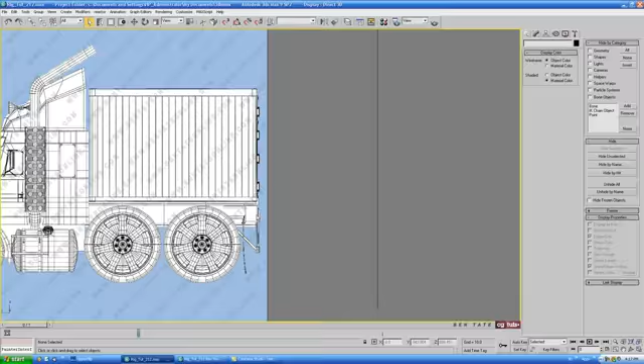Okay, and then we'll go into the left view here and start working on this front rim. Let's zoom in on that. This is going to be a little bit difficult for us to model here. Let's maybe start with the outside of the rim, and let's do that out of a tube.

So let's go back to the create panel, grab a tube, and draw it out here in the center. Let's take that up to about there, give it a little bit of thickness and a little bit of width. Okay, we'll maybe go to the front view here.

Let's switch this to the back view now. We'll just move this over to the right side here and try to line it up with the tire. I'm going to move it out to about there, just so that right side is lined up with the outside of the rim.

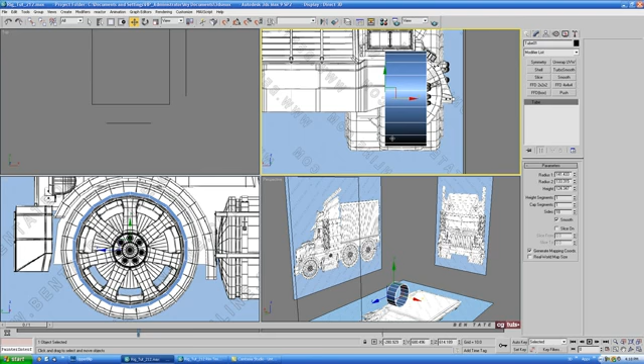We can also get rid of these height segments, we don't really need those. We'll make it a little bit wider here, and we'll apply our blue shader. Don't worry if it's not lined up with the other side, we'll probably have to make some adjustments to it later on. So we'll just start with something like this.

Okay, and if you look at the blueprint here, you can see we have 7 spokes on the rim, so we're going to want to use a multiple of 7 for the sides on this tube. I'm going to take this up to maybe 21, so we can work on maybe 3 sections at a time, and then we'll rotate it around to complete the full shape.

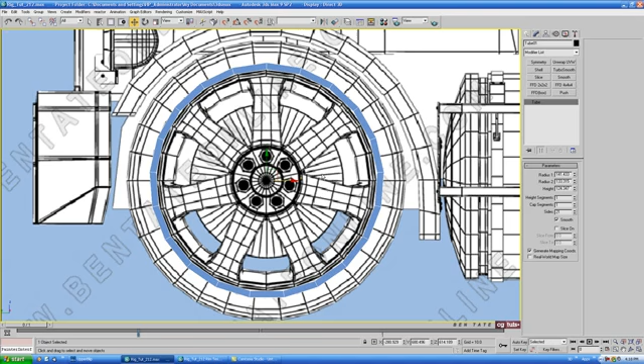Okay, so let's maybe start with something like this. We'll do 141.5 for radius 1, say 133.5 for radius 2, and the height we'll just leave at about 125, with 1 height segment, 1 cap segment, and 21 sides. Okay, so let's convert to editable poly now.

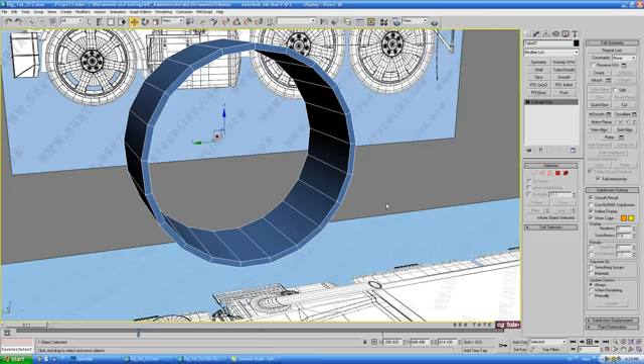Okay, we'll just add some edge loops here in the center. So let's go over to edge, grab one of the center edges, do a ring and a connect, and we'll use 1 segment here. Let's slide this towards the outside, and take that pretty close to the outside, let's do about 90 or so, and okay.

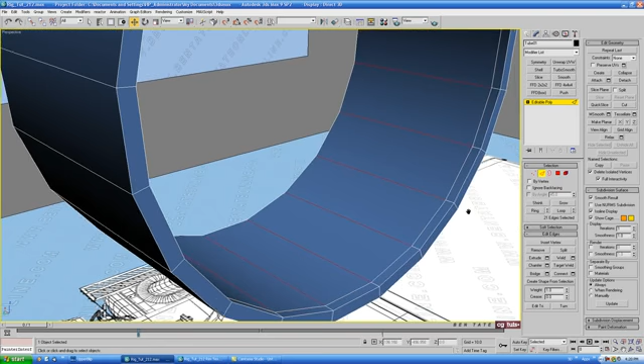And we'll do another ring on the inside edges, and do another connect on that. We'll push this back a little bit more. Let's do maybe around 62, 63, something like that. Maybe even a little bit less, about 60 with 1 segment.

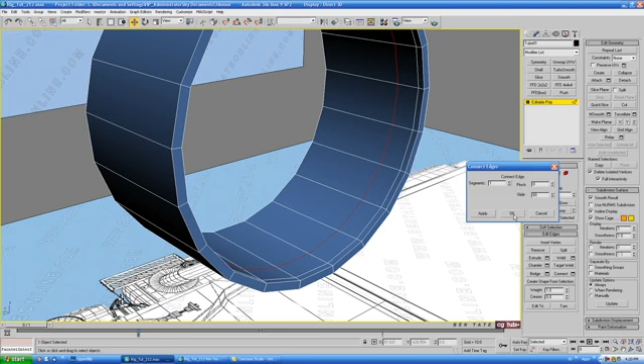Okay, and then we'll ring the middle edge one more time, control click polygon this time. We're going to want to extrude these faces up to give us a little bit of a lip in there. So we'll go back to the front view here and do an extrude, by local normal. And for the height, I'm going to take this up a little bit here.

Let's maybe look at it in perspective. I'm going to take this up quite a bit because we're actually going to pull out one of the spokes from these faces on the side here, so we're going to need quite a bit of room. Let's do maybe about 16 and okay, and I think that should work for us.

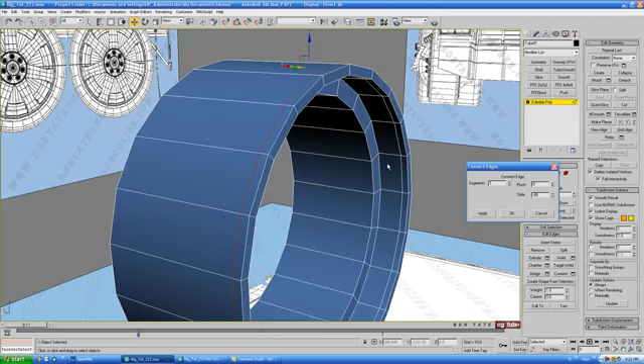So let's go on the outside here and start giving this some detail before we do the spokes. Let's grab an outside edge here, do another ring and a connect, and slide that over to the outside. Pretty close, let's do maybe about -92 and okay.

And then we'll just ring one of these small edges on top here, control click polygon again, and we'll extrude this up. So another extrude, local normal. Take that down quite a bit here, we'll just make a little bit of a lip that the tire can tuck in behind. Let's do maybe about 5 and okay.

And we'll just give the front a little bit more shape here. So let's grab this edge on the outside here, okay, we'll loop that one, and we'll see if we can kind of taper this in a bit.

Let's also remove this edge here on the front first, we don't really need that anymore. So let's loop that one and control backspace it out. Grab the inner one again and do another loop. We'll go into the front view here, go to scale, and we're going to scale this up to taper that front edge a bit, so it's a little bit thinner. Maybe something like that, so we have a little bit of a slope on the side there.

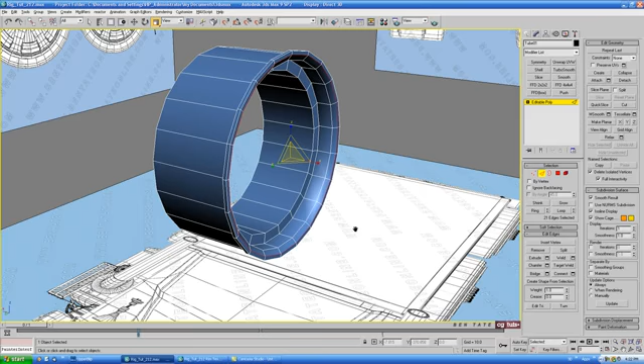Okay, so let's move on to the left view again, and let's go to polygon. Make sure you have ignore back facing turned off, and we're just going to grab the two sections of polys here at the top. We'll hit Control I to invert the selection, and then we'll delete these out.

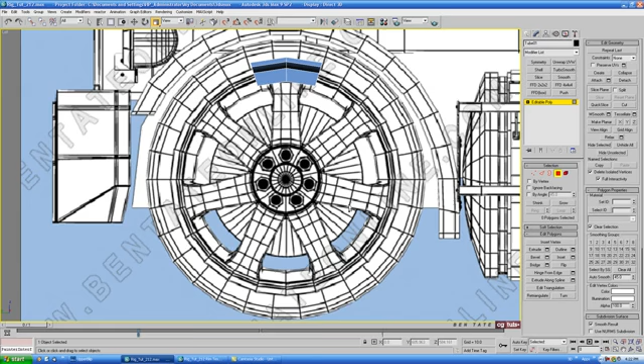Okay, we'll just work on one small piece of this at a time. Okay, so that's what we have so far. And now we need to kind of extrude these faces out and actually connect them to something in the center here.

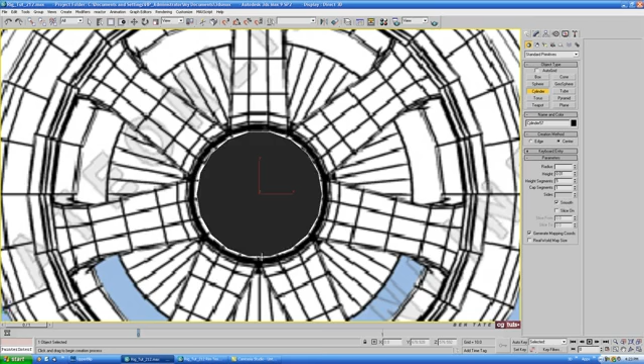So we'll go back into the left view and we'll grab maybe a cylinder. We'll draw that out in the center again, and we'll take it up to maybe about there. Give it a little bit of thickness. And let's put our blue shader on it.

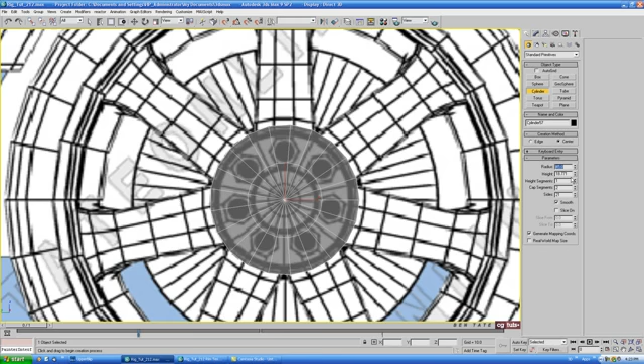Let's take off these height segments, and we'll also do 21 sides for this guy. Okay, so up that to 21. Let's give it an extra cap segment maybe. And let's do about 45 for the radius on that one. We'll do about, say, 25 for the height right now, and we can adjust that later on if we need to.

And we'll just move this over into position here. So I'm just going to move this over in the front view. Okay, we'll kind of line it up here in the center, just behind where these lug nuts are.

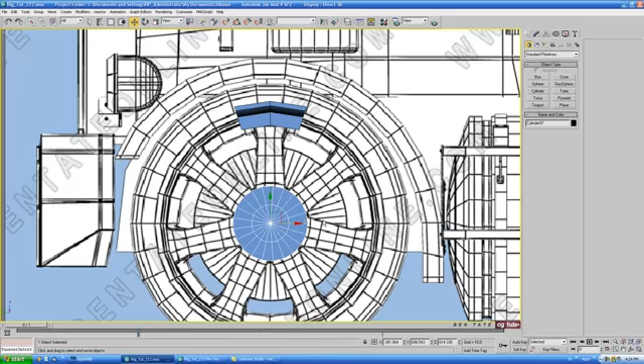Okay, and let's convert this one to edit poly as well. We'll go into polygon and we'll grab—let's actually rotate this a little bit first before I delete those. So I'm just going to rotate this a little bit here so that this face at the top is actually flat. Just give it a little bit of a spin there until it straightens out like that.

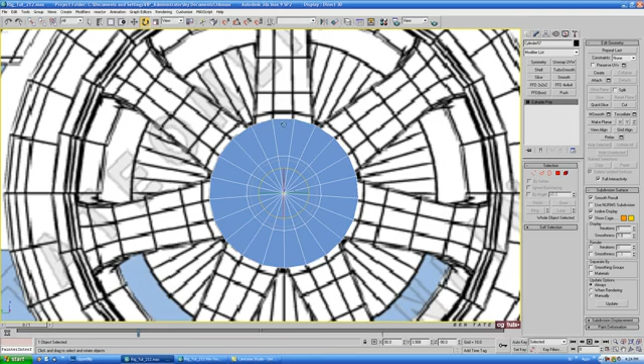Okay, so we have these polygons here right in the center of this spoke. And now we can go into polygon, and we'll just grab the three sets of polys at the top there. So we want the top three, the back three, and the front three here. Do Control I again and delete.

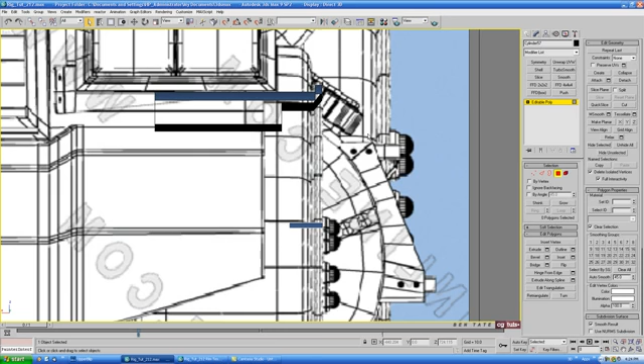Okay, now we'll attempt to extrude some faces out of this piece and actually connect it to this lower part. Okay, so let's get out of polygon here, go back up and select the original piece. And we'll go back into polygon and grab these two front polys here. We're going to need to be able to support this shape when we pull this out.

So what I'm going to do here is actually inset these polygons, and we'll do that maybe—let's do maybe about 1.5. And okay.

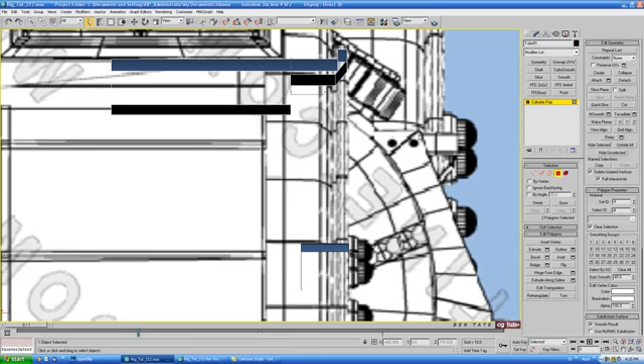And we'll just go into the left view here, and we're going to hit extrude, and we're going to extrude it out just a little bit. Okay, we'll just do about 5 and okay. And I'm going to delete these polygons now. Okay, so we have it extruded out like this.

And we'll go into border and we'll grab the border there around that open hole. And we're just going to shift drag this kind of out and down, and it's going to take a little bit to clean it up, but we'll do that in a minute. Okay, so let's just hold down shift, pull it out again on the X. I'm just going to kind of angle this down a little bit, give it a little bit of a spin here.

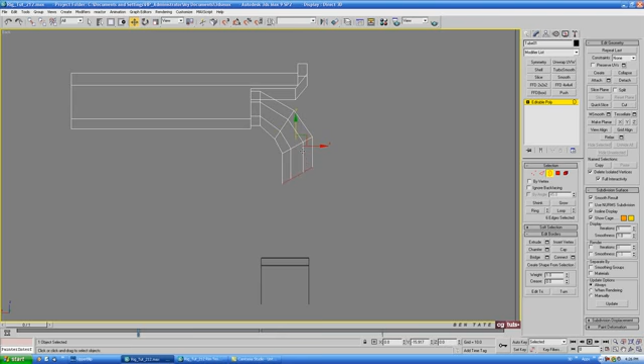Let's extrude it again, give it a little bit more of a spin. And we'll extrude it down. Straighten that out as well. And don't worry if the shape isn't even, we'll fix that manually in a minute. Okay, one more time, shift drag it right down to the bottom there.

Okay, now we need to make some adjustments. Okay, so this is pretty much what we have.

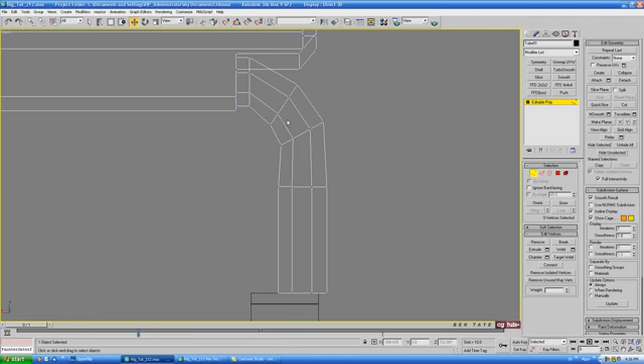Yeah, let's go in here and start kind of adjusting the shape here. You can see it's obviously way too wide at the bottom compared to this top piece. Okay, we also have these back verts here kind of dipped in, which is giving us a bit of a curve there. So let's maybe adjust those first.

I'm just going to grab these ones here, push them slightly to the back, so we have the back almost flat here. And we'll just work our way around kind of moving these down manually. Okay, and we'll grab these two and just kind of straighten it out.

And for these ones here, let's maybe just adjust the curve here a little bit. I'm actually going to grab this one, let's move that back up a little bit more. Okay, we'll move these guys out.

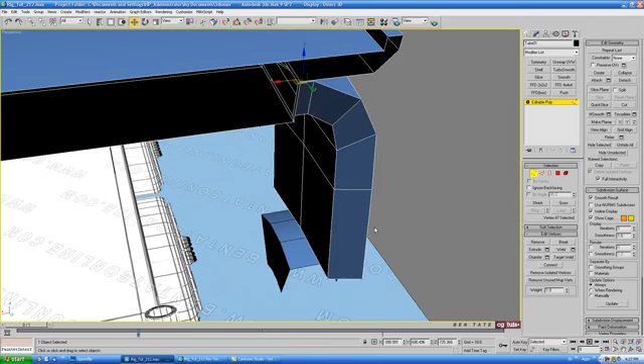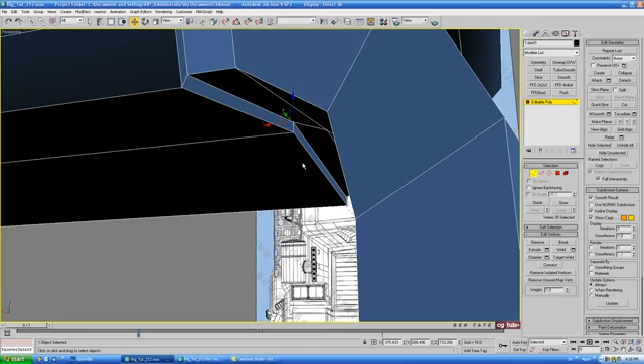Okay, I'm just going to taper this going up into the inside there. I'm going to leave this a little bit farther out than we did below. Bring this guy here down a bit. Okay, I'm just going to see where this vert is. We don't want to move this because that will affect the shape of the actual cylinder, so we're going to leave these ones in the position they are. We'll just even the curve out here going down. It doesn't matter too much, this isn't going to be a really noticeable part, so don't worry about getting it perfect.

Okay, I think we'll start with something like that. Let's go back into the left view here. And we also need to taper this in - you can see how small that is in the background there. So we're going to do that by selecting these edges.

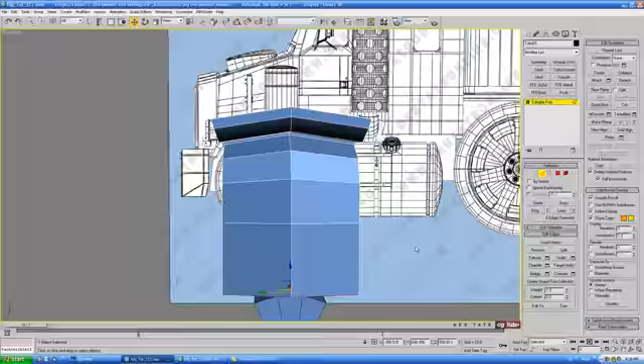Let's just start maybe with this one here, I'm going to do a loop on that edge. Go back into the left view, we'll turn on our see-through here. I'm just going to use scale on the X to kind of taper this in. Okay, it's going to take quite a bit of adjusting, so I'm going to bring that in a little bit. I'm not going to go in quite as far as what we have in the blueprints. Maybe something like that. All right, we'll grab the next loop down and do a loop on that edge.

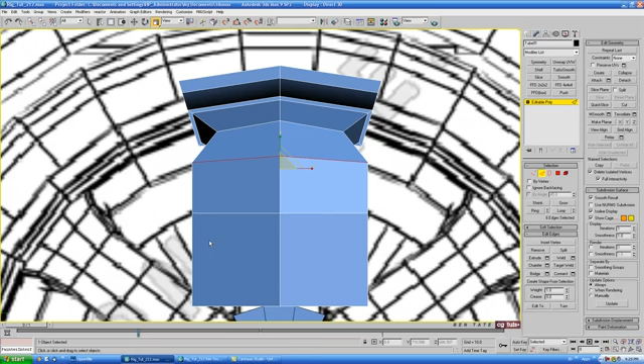Back into the left view, and we'll just taper this in a little bit more, so just scale it on the X. Bring it in like that. Grab the next edge down, loop that, scale it in.

Okay, and finally for the bottom here, we'll just grab the verts. So let's grab all the bottom verts, and we'll just taper that in a bit as well. Okay, now give us a little bit of a shape on there.

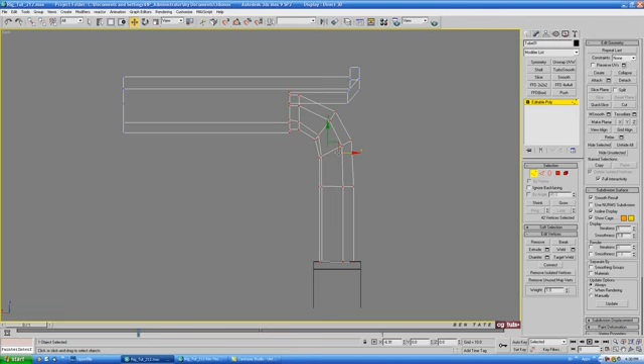Okay, we also need to line it up with the polygons here on this lower piece. So to do that, let's actually move some of the stuff back a little bit. I'm going to grab these verts here around where that spoke connects, and we'll grab all the verts on the spoke as well. We'll leave these ones on the front of the rim deselected, and we'll just push this back a bit, until we kind of center it with that lower cylinder. Like that, which will give us a place where we can actually attach that together.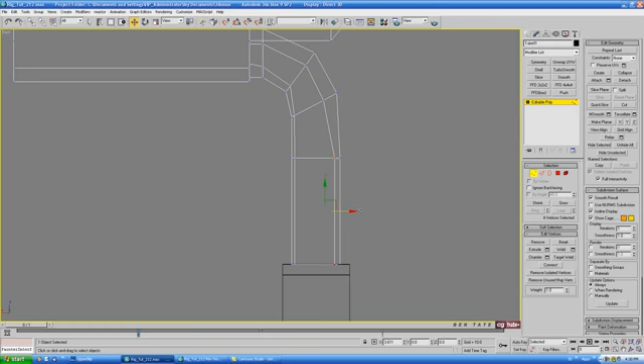Okay, I also don't want to have a total curve here on the front, so we're going to need to adjust that as well. We'll do that the same way. Let's grab these verts here, and we'll just push those out a bit towards the front. Something like that, and we'll do the same thing with these ones, just grab these and push them out. Okay, and don't move these verts here as well, because that'll affect the shape of the cylinder.

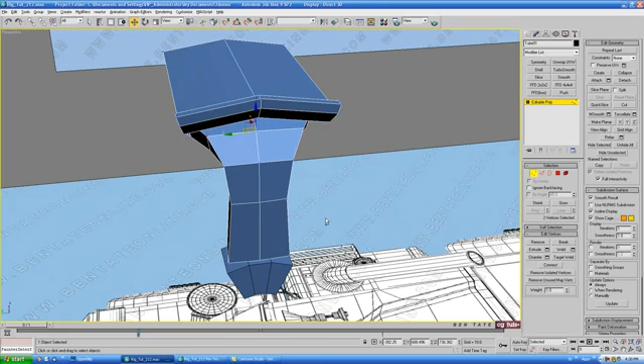Okay, so let's go down here, we'll get out of vertex, select that bottom cylinder. Let's go to polygon, and we'll grab the 3 top polygons, and we'll do the same thing here - we're going to do an inset on these. We'll take it up a little bit more than that, let's do maybe about 2 for starters, and okay.

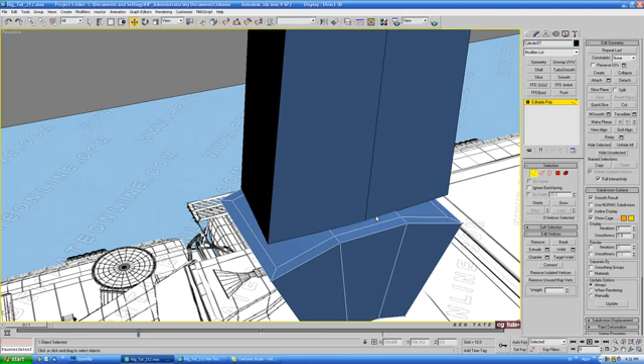And let's maybe adjust the width here as well. I'm going to grab these 2 left verts here, as well as the 2 right ones. We'll put on our edge constraint up here, and we'll just scale this a little bit in on the Y-axis here, so it's a little bit skinnier in the middle.

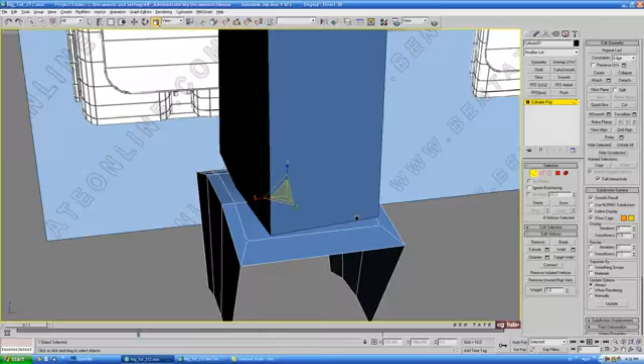Okay, just like that. And we're going to need to adjust the bottom of the spoke here a little bit more. So let's go back out of vertex here, grab the spoke again, and we'll reselect its bottom verts. Okay, and actually before we do that, let's maybe grab this edge here as well as the back one. We need to obviously have a point where we can weld these to these segments down below.

Okay, so I'm going to select an edge there, and we'll do a chamfer on this. Let's take this up until it pretty much matches up with those 2 edge loops. Just like that, about 6.5 or so should be good.

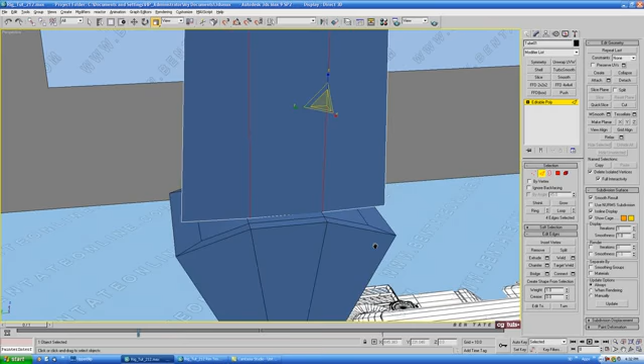Okay, let's get out of edge there. Rather than scaling the sides, let's grab this, go back to polygon, and those 3 polys should still be selected on the top, so we'll delete those out now.

Okay, back in the front view, or the back view, sorry, just going to readjust this a little bit more. Let's go back to vertex, grab these verts here, and move them in a bit. Let's turn off our edge constraint first. We'll just move those over, grab the front ones here and move them back. Okay, so it kind of fits the size that we need.

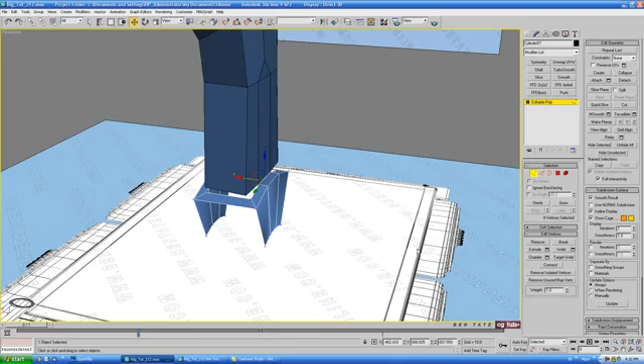Okay, let's get out of vertex there, and we'll see if we can attach this together now. So let's grab the spoke, go over to attach it to the lower cylinder, and back to vertex, and we'll just weld this together now.

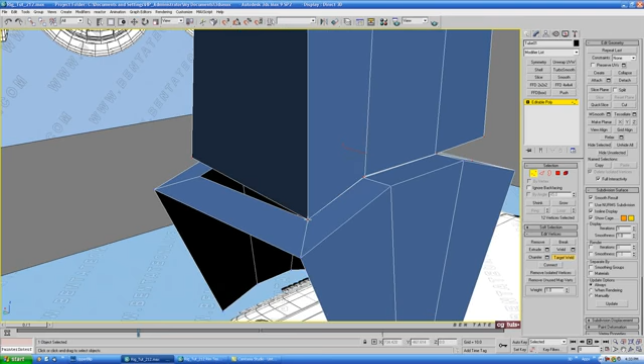Let's go over to target weld, grab one of the corners here and weld it. We'll just work all the way around this, welding all the verts. So weld these to these ones, around the back and around the front. One more here, and here. Then I'll continue those down onto the lower cylinder.

And let's also go up here and grab maybe this vert here and this one. I'm just going to open up the weld box and we'll just take this up until these two verts snap together, okay, so looks like about 15 or so. Hit OK to that, same thing on the back, grab those two, hit weld. And we'll still have an extra vert there up where the top of that triangle was.

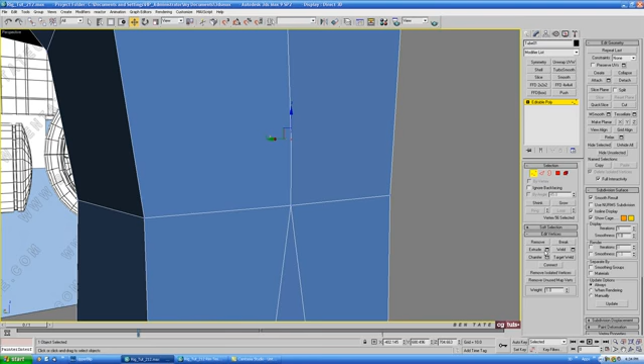So we'll go to target weld and we'll just weld that one. It's a little hard to see here, it's right in the center, this one here, down to that vert there. Okay, same thing on the front, this vert here, down to this one.

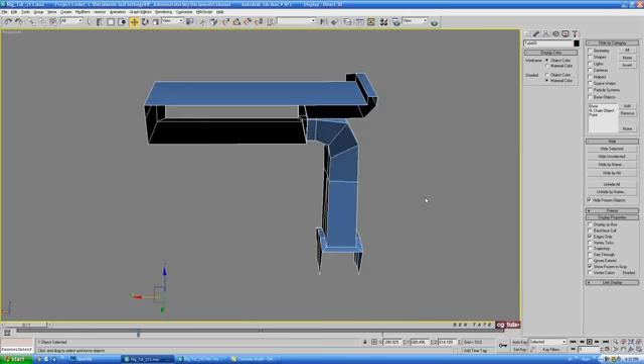Okay, so now we need to add some support edges before we can start copying this around. We can actually get rid of these blueprints again for now, just so it doesn't slow down the capture. I'm just going to check that back on, and we'll just continue to work on this. Okay, so I think that's basically the shape we're looking for here.

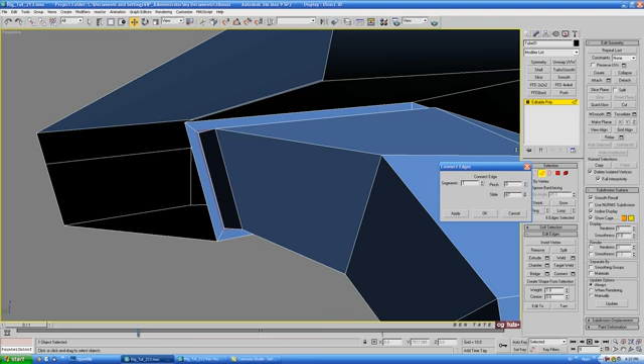Let's start adding some support edges. So let's go up into the top here. It's going to be a little hard to see, but we'll go into edge and grab one of these corner edges here around the inset that we did. Let's do a ring on that, and we'll do a connect, just one segment, and slide that towards the spoke. I want this one pretty tight, so let's take it up to maybe about 65 or 70. We also need to add one around it this way, so let's grab that corner edge there, another ring, connect it up, and slide that back, about the same distance, around negative 85 or so.

And let's maybe support the actual spoke here. So let's grab one of these side edges, do a ring on it, connect that up. This time we'll use two segments, and we'll just pinch those out a bit. I'm going to leave it a little farther back so it's a little softer on the corners, let's do maybe about 75. Same thing on the other side here, ring one of these edges and connect.

And we'll do the same thing on the front. Let's maybe grab these two edges here, we'll ring them. We don't want to continue these up and over the top of the rim, else it's going to give us a hard spot right here on each side when we later array this around. So we want to end these edge loops off somewhere underneath here.

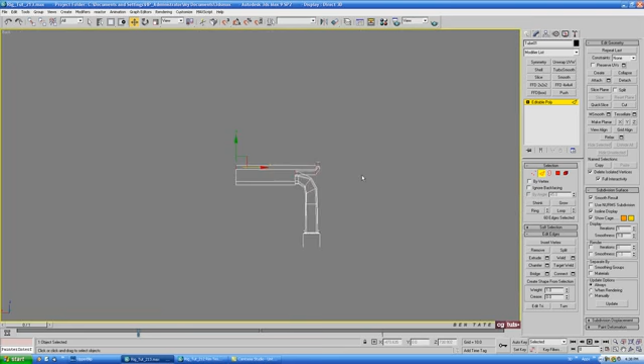Alright, so let's go into the back view again. I'm going to deselect these back edges by holding down Alt. We'll also deselect these ones here at the top, and maybe this one here.

Okay, same thing on the inside here. We don't want these to go all the way to the back, so I'm just going to deselect these two back ones. Let's maybe just leave it selected up to this point for now. We can clean it up a little bit later on.

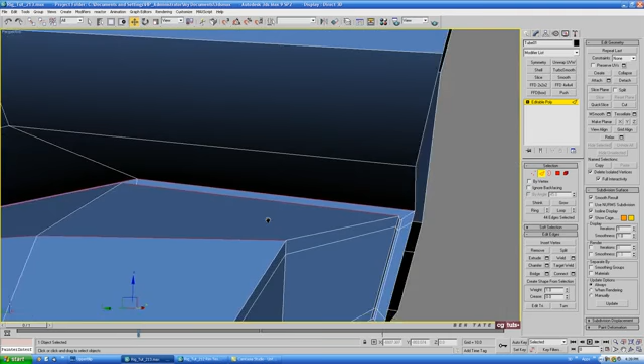Okay, and on this part here, let's maybe just leave it selected up to that inner edge there, and we'll clean it up a little bit more later on if it gives us a problem.

Okay, so with those edges selected, let's maybe deselect this front bottom one on each side as well as this one. Okay, same thing on the back here. Get rid of this edge, this one, and this one, so they end off right here on each side, as well as the front on each side.

Okay, and for this one we'll do another connect, and we're going to use two segments here. We'll do that about the same, about 75, and hit OK. We don't need to have these center edges, so let's click one there, control click the one next to it, do a loop on that.

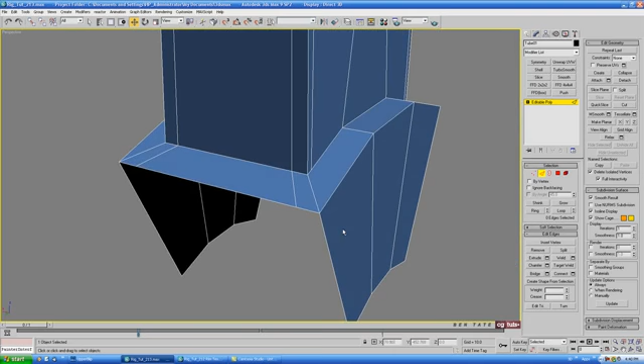And we'll just control backspace those out. Okay, down at the bottom here, we're going to need to clean this up a little bit right here. Let's maybe do a ring on this edge first. Okay, and that won't go all the way around because this is an n-gon here. Alright, so we're just going to have to manually select these edges.

Okay, all the way around the back. And we'll do a connect on that. We'll just use one segment, no pinch, just slide that in towards the base, and we'll do maybe about 65 or 70 on that one.

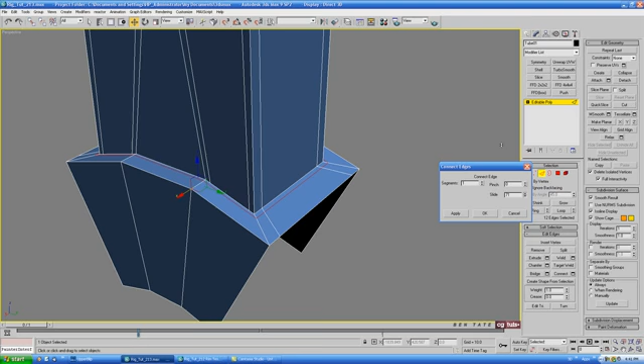Okay, same thing on the back here, we don't actually need to have these extra loops. So I'm going to grab this one and loop them. That should go right up to that point there, and we'll just control backspace those out.

Okay, so we're going to need to kind of terminate some edges here. Let's maybe do that right now. So I'm just going to go over, get out of the edge here. We'll go to cut, and we'll cut from the bottom of this edge here where this vert is over to this edge. Okay, and just try to get that kind of straight there, and then right click to end it.

So it comes straight across. We'll do the same thing over on this side. Cut that right over, and the same thing on the front. Okay, just cut that across, right click to end it, and same thing over on this side.

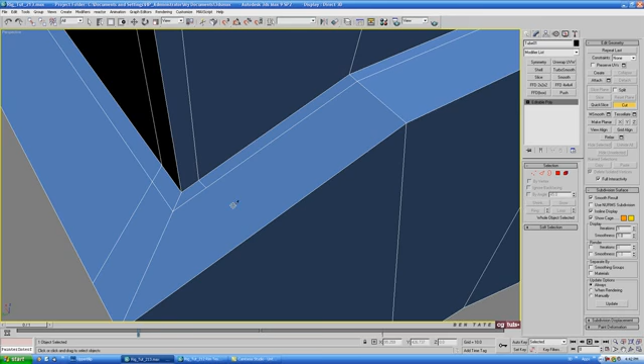And now we'll just go over and turn off cut here, and I'm just going to go back to vertex. I'm going to grab the vert right there, as well as this one here. Okay, and we're going to actually connect this up. Do the same thing over on this side, grab that one, and do a connect.

And the exact same thing on the back. Connect that one up to this one, and this one up to this one. Okay, that's going to give us a triangle right here, but I don't really think that'll give us any problems in this particular situation. Okay, so we'll leave it like that just to end those loops off.

For the side ones here, we need to actually kind of straighten these out. This might give us a bit of a problem later on, so let's grab this vert here, and let's grab all four of these for a second. Okay, we'll see if we can see this in the top view.

Okay, so there they are there. We're just going to use scale on the x-axis to kind of straighten these out. Alright, so I'm going to take that over just a little bit here. Alright, that's going to be a little hard to adjust, so let's just do it by hand here.

Okay, I'm going to go in there and just grab this one vert, straighten that out. Okay, we'll follow that edge down and grab this one, which is the one on the outside, and we'll just pull that over until the edge goes straight.

Okay, we'll do the exact same thing over on this side. Let's just grab this guy, straighten him out. This one here, straighten him out.

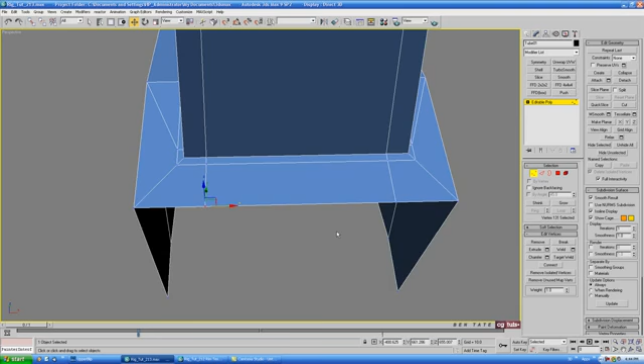Okay, same thing over on the other side. Just spin around here and see which verts they are, so we'll grab one there. And we'll just pull that over until it straightens out. And we'll grab that end guy and just do the exact same thing. Okay, same thing over on this side.

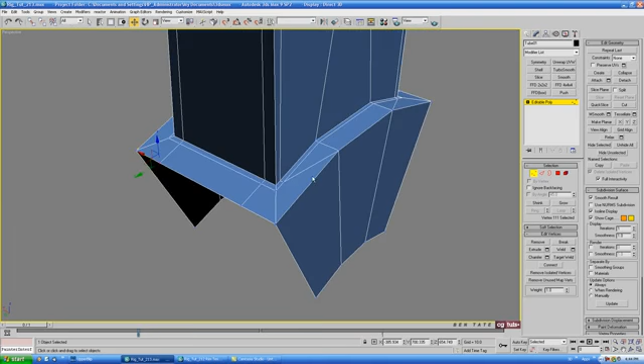Okay, just like that, so these will be able to be welded up to the next piece that'll be in here once we copy it. Okay, so let's go back up to the top here. We still need to add some more edges up here.

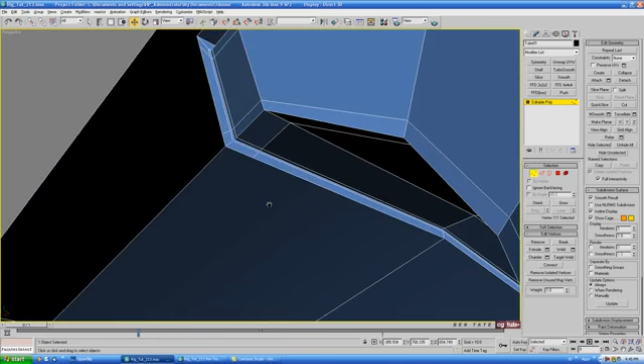Okay, let's maybe do a ring on this edge here. Now it won't ring actually because we still have that vert ending off at the back there, so we'll just manually select these three edges here. Okay, another connect, use two segments again, no slide, and we'll just pinch those out to support these outer edges.

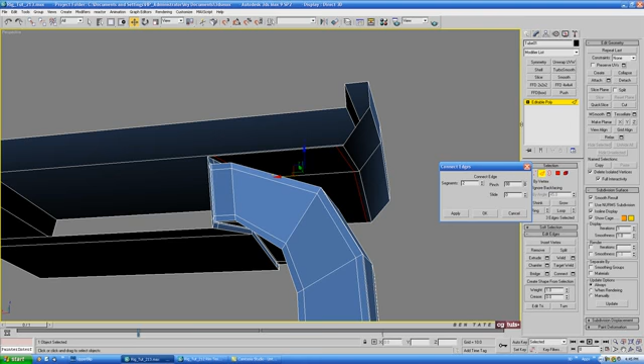Alright, let's do maybe about 90 or so on that one. And we'll do the same thing on the front here. Ring those and connect them up.

And we'll do this one a little bit sharper. Let's do maybe about 80. Same thing on the front.

Let's take this one down a little bit. Let's actually just do one segment here for now. I'm going to slide it down to the bottom so we can kind of sharpen this bottom edge a little bit more than the top one. Okay, so leave it about there.

Then we'll ring the edge again and connect it. And this one I'll slide down a little bit more so it's a little softer at the top. Let's do about 50 or so.

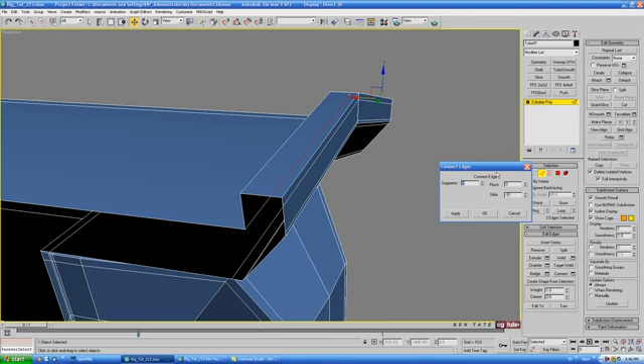Okay, and we'll grab the top edge there, do another ring and another connect. We'll use 2 segments on this one, no slide. And we'll just pinch those out slightly.

Now we'll use about 50 again. And the exact same thing on the back. Ring that back edge and connect it. And we'll do that about 50 as well.

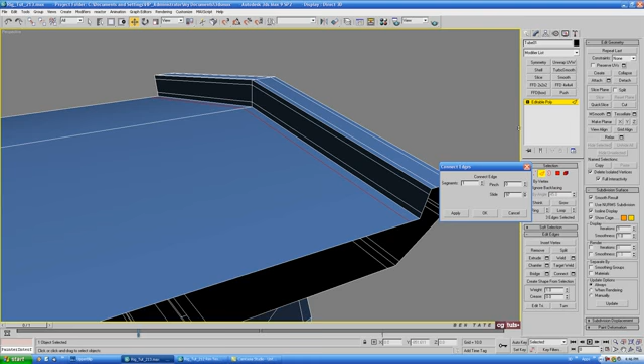Okay, and let's grab this one here. Ring and connect, and let's use 1 segment on this one and slide it towards the back there. I want this one to be quite tight, so let's maybe do about 99 on the slide with 1 segment.

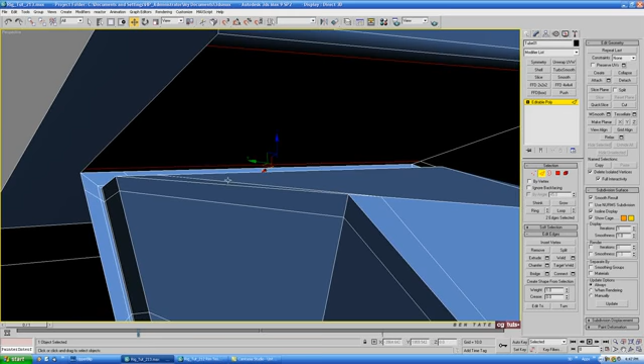Okay, and now for these edges we need to terminate here. I'm going to do this a similar way. We'll just grab this edge and the back one there. This is going to be a little bit hard to see here, so I'm going to try to get a decent angle on it.

And we'll do a connect here with 1 segment. Okay, I'm going to slide that down towards the other end until the end there kind of lines up over where that vert is. So it looks like around negative 82 should be good.

We'll do the exact same thing over here, grab this edge underneath, as well as the back one, that back support edge there, and connect it up. For this one, we'll do positive 82, so we have it in the same position.

Alright, I'm going to try to zoom in on this. So let's grab maybe the vert there at the end, and we'll hit Z to zoom on it. Okay, and we'll just do a connect on these 2 verts here to cut that edge across.

Alright, then we'll come up to the front, go to target weld, and we'll weld this vert here to this one on the outside here, which will also give us a triangle, but I don't think it will really cause any problems. Okay, and then I'll terminate that edge loop here.

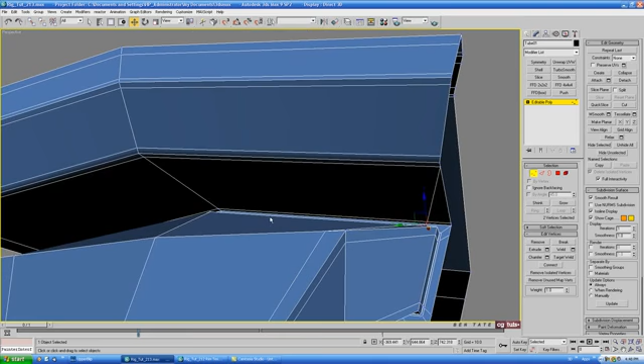So we'll do the exact same thing over on this side. Let's grab a vert down here, hit Z. Select that back one as well. Okay, those 2, connect it up, and then target weld that front vert over to the side, so this one over to here.

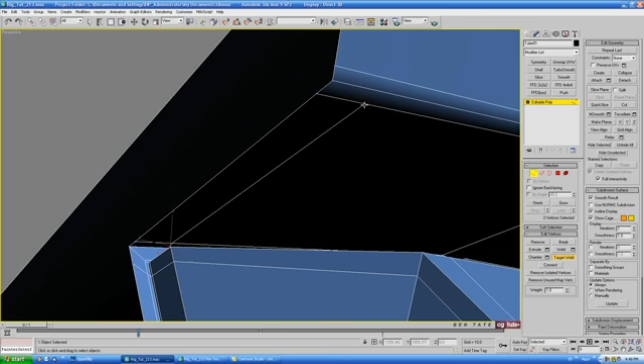Okay, and let's see. We still need to do something with the back here, but I think we'll worry about extruding out the lip once we have the full cylinder complete. It'll be a little bit easier for us to work with.

Okay, so let's maybe test smooth this. I'm just going to throw a turbo smooth on top, 2 iterations in iso line, and we'll see if everything's smoothing okay here.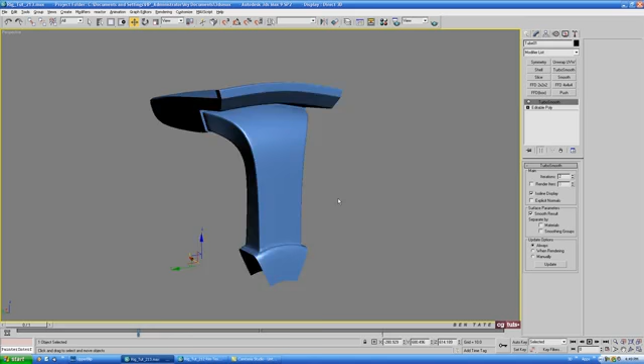Okay, we still need to add some support edges down there, obviously, as well as to the back, but the spoke seems to be holding up pretty well. Everything seems to be smoothing correctly here. Alright, so let's delete the turbo smooth.

Okay, and I'm just trying to think if we missed anything. Okay, I think we're okay. So let's maybe do a test on it, see if we can array it around.

Okay, so the pivot point should still be in the center of where that cylinder was originally, which is where we need it to be. So we're going to go up to Tools, down to Array in the left view here, and we'll click on Rotate, set it to 360 degrees, choose Copy, and we're going to take the count down to 7.

Okay, and this will be the right amount of spokes, but we're going to have a gap between each set of them. If we hit Preview, you can see what I mean by that. And you can see that the lower cylinder there is filled in completely the way we want. So now that looks okay, we'll just hit OK to that and get our copies.

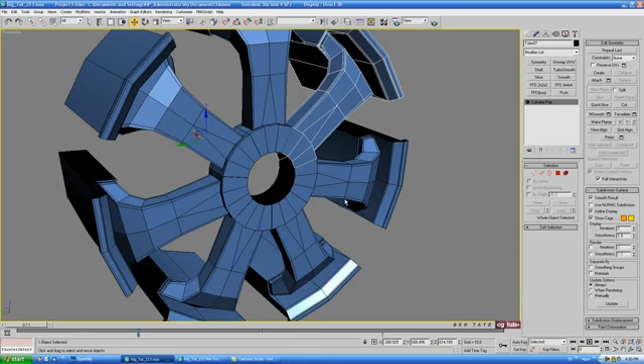Let's reselect our center spoke there, the original one. We'll go over to Attach, open up the Attach box, select all the tubes, and hit Attach to make it one object. Then we'll go to Vertex, hit Control A on the keyboard to select all the verts, and we need to complete a weld between each of these pieces here.

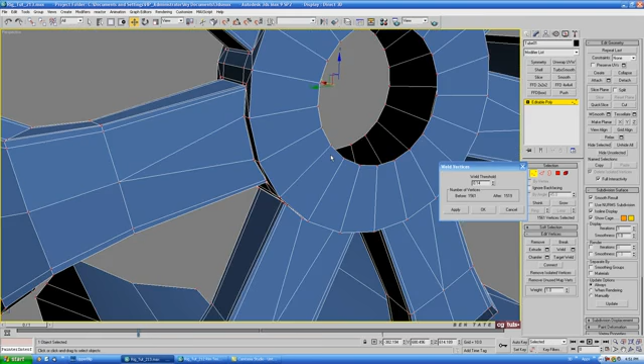So we'll open up the weld box with all the verts selected. We'll take this way down, then go up on this slightly until we see those snap together. It looks like about 0.14 or so should be right. So we'll hit OK to that.

Now we'll go over to Border, and we'll grab the borders up here at the top, one on each side, and hit bridge. That'll fill in the extra section that we need of the cylinder. Let's check that out in the front view here. You can see that looks about even with all the other sections that we have, which will make it a perfect circle once we have it filled in.

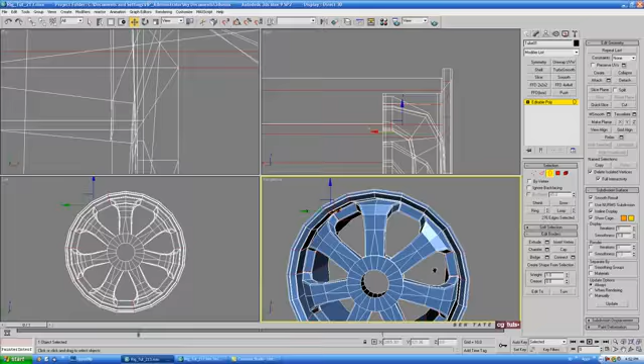So I'm going to grab all the borders here between each of these spokes, holding control, and hit bridge. Now it'll give us the completed rim. All right, so we still need to do some work on it, obviously.

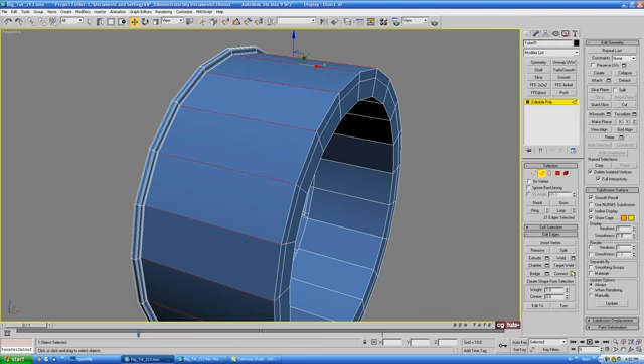Let's go up on top here, and we'll try to figure out something we can do with the outside. Let's go back to edge, grab the top edge again, do another ring and another connect, and slide that back towards the back. We'll repeat the process that we did on the front to get this lip coming out. Let's look in the top view and see how even that is.

Let's do about negative 91 on the slide, one segment. Another ring, and control click polygon. We'll look at this maybe in the back view here. Let's extrude that up, local normal again, and it looks like about 5 is what we did originally. Okay, so the top looks even there, so we'll say okay to that.

We'll go on to the back side here. I'm going to grab these two loops here, and we'll just control backspace those out. We don't really need those in there.

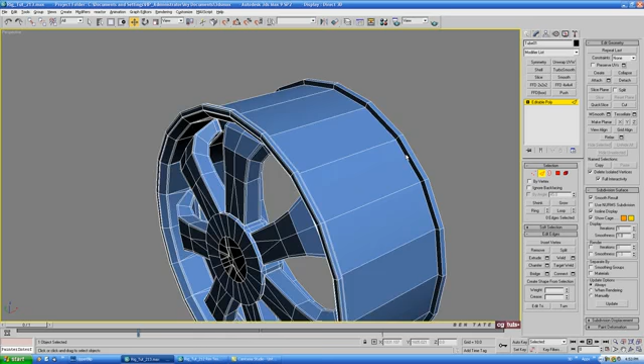Let's also see if we can do something here. Let's add another edge, kind of an indent here like we have where it goes in and comes up. We'll mirror that detail on the back here. The easiest way for us to probably do that would be to add another loop in the center here.

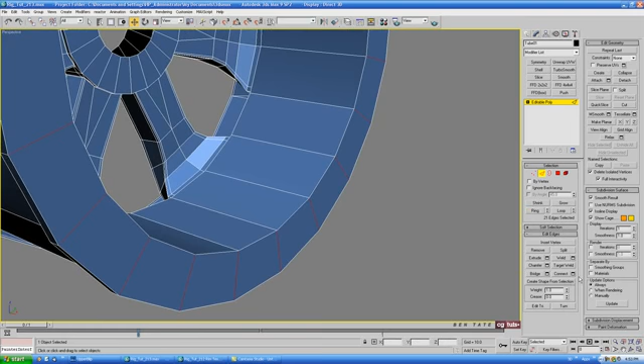Let's add one on the outside, it might be faster. So I'm going to ring that edge there, do a connect. Let's maybe do something like that. We'll just take it down maybe a little bit towards the outside. Don't want it to be too thick. Let's do about negative 20.

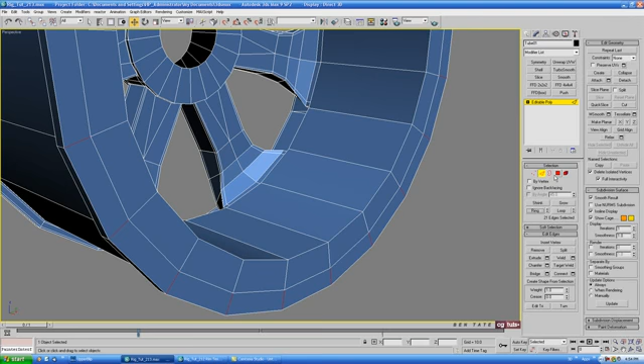And okay. We'll just bring this edge here, control click polygon again, and we'll extrude this out a little bit. So we'll bring that out, maybe something like that. Let's do about 14 or so, and okay. That'll give us that little step detail we need in the back there.

We do need to adjust the top now. So let's grab this loop, those 3 edges there, we'll loop them, and we'll just push these towards the back to thin that out again.

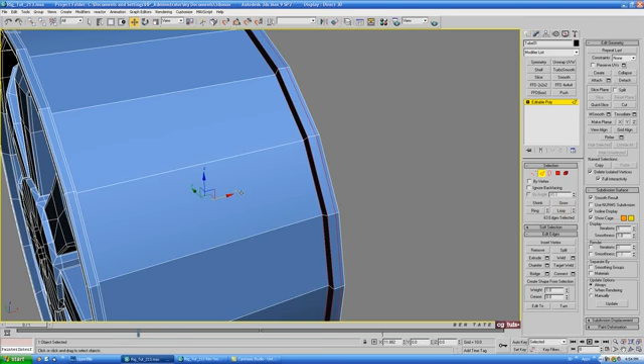Okay, we can actually get rid of this one here. I'm just going to loop that edge and control backspace it. We'll just move this in, these 2 edges in, so it's a little bit thinner here. So loop those again and slightly pull them back on the X.

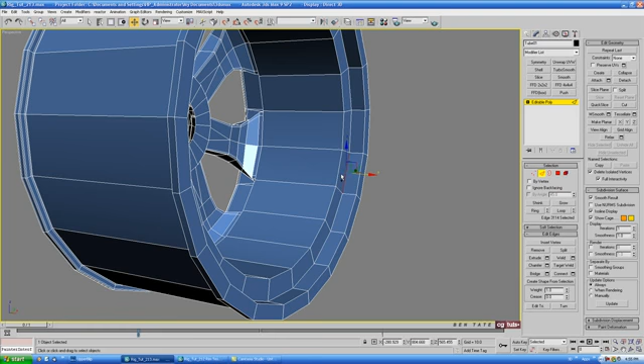And we'll grab the 2 inner loops here, and push that a little bit more in towards the tire. Okay, just like that. And let's maybe grab this loop. We'll do a slight scale on this again to kind of get that taper that we had in the front.

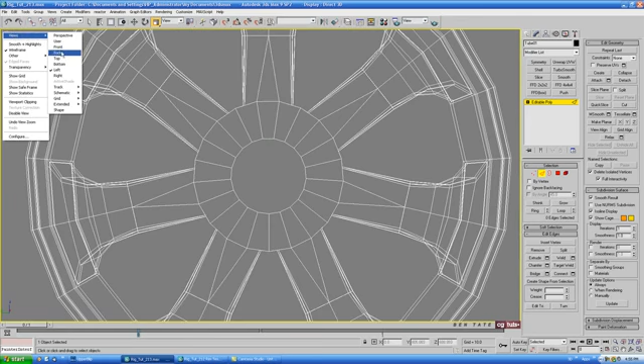So we'll go back into the left view. Let's change this maybe to the right view, turn our shading on here so we can see it. Let's reselect that edge, and we'll slightly scale this out the same way as we did at the front. I'm going to scale it up a little bit, just so we have a slight taper on those faces.